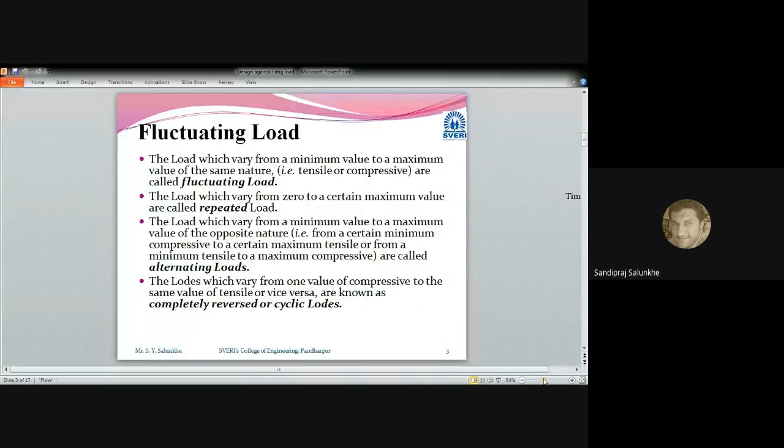Next point we are going to see is the fluctuating stress. As already we have seen, when a load is applied on any component, it will induce stress. That's why there are the same types of stress which get induced in that component, namely fluctuating stress, repeated stress, alternating stress, and completely reversed or cyclic stress. In this case, the definitions remain the same, except instead of load, the word stress comes into picture.

The stress which varies from a minimum value to its maximum value of the same nature is called fluctuating stress. The stress which varies from 0 to a certain maximum value is called repeated stress. The stress which varies from a minimum value to a maximum value of opposite nature is called alternating stress. And the stress which varies from one value of compressive to the same value of tensile, or vice versa, is known as completely reversed or cyclic stress.

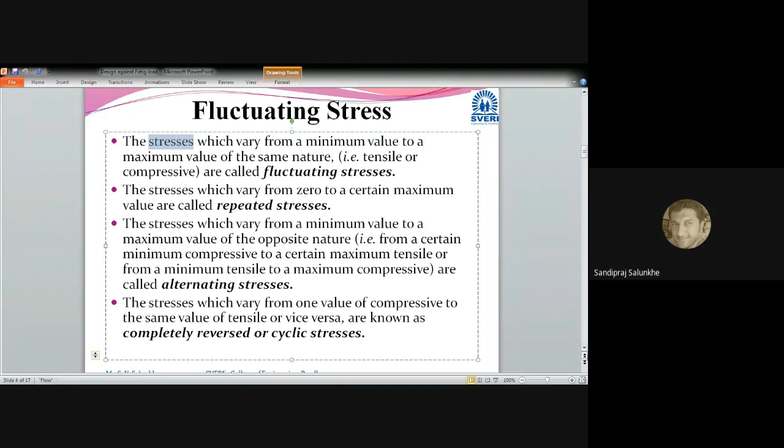As we have seen in case of loads, loads are also defined in the same manner - fluctuating load, repeated load, alternating load, and completely reversed load. These same loads create the stress. So when we say stress gets induced in a component, it is a product of the applied load or applied force. So the definitions of fluctuating stress, repeated stress, alternating stress, and cyclic stress are parallel with the cyclic load definitions we have seen.

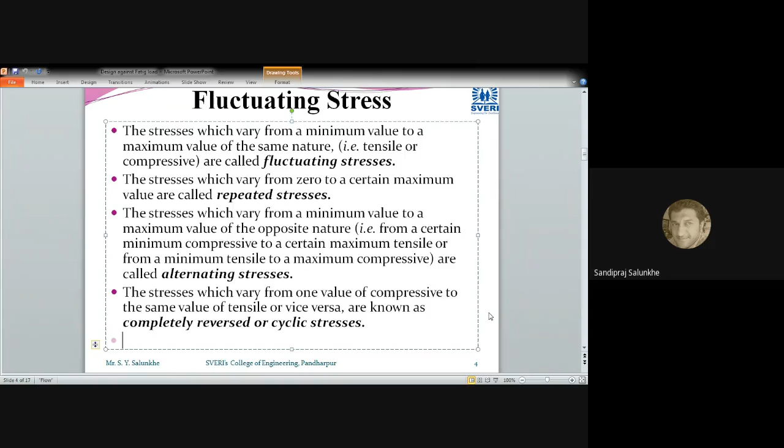Now let's see how these loads actually behave - that means how fluctuating stress looks. In yesterday's lecture, I drew a graph showing how loads vary, how fluctuating load looks when we plot time versus stress or load. Here time is mentioned on the x-axis and stress on the y-axis. And we will see how repeated load acts.

In this case, we are going to use some terms, and these terms are useful for further study, that's why they are important. We will say that somewhere the value of that stress is going to become 0. So here we consider that stress value is 0 - when we mention stress on the y-axis, its value is 0 where it crosses the time axis. And above that, we take the reference of the 0 axis and calculate or measure the stresses.

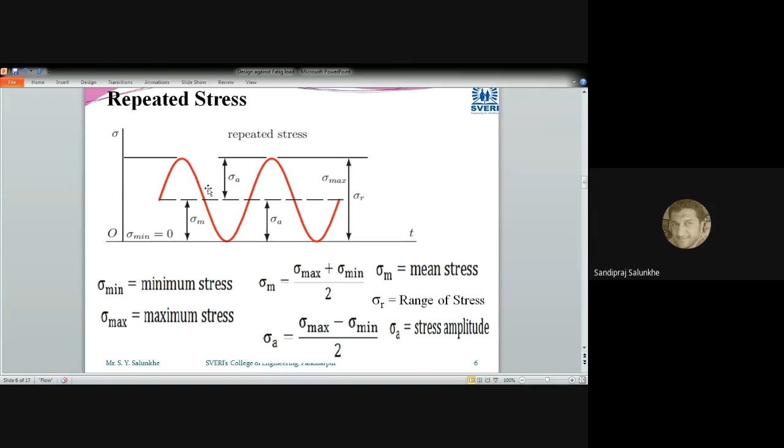Now, the second type which we have seen is the repeated type of stress. This repeated type of stress and fluctuating stress vary from each other. In this case, this repetitive type of stress is induced on one side, and its value is going to become zero. If you see in case of fluctuating type stress, this value may not become zero; stress remains above the zero line. Whereas in case of repeated stress, this value of stress has to become zero, and only then do we call it a repetitive type. That means once the tensile stresses are induced to their maximum value, the minimum value will again become zero.

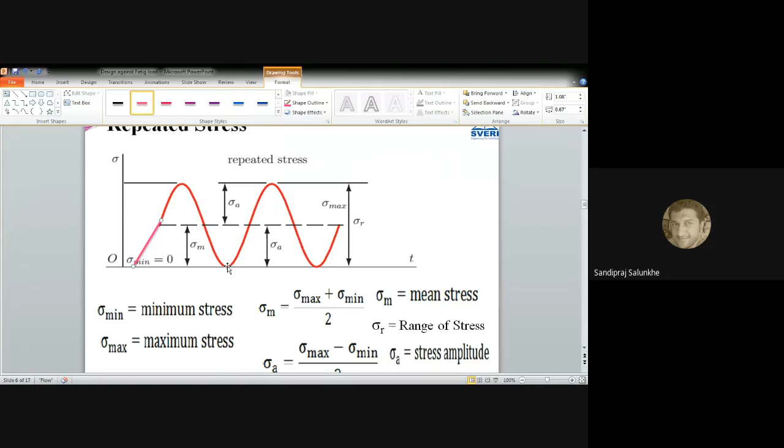Though this sinusoidal curve has started from this point, which has been drawn here only for the sake of understanding, otherwise this curve has actually started from zero, and it is like this. So from zero it has started, going to reach its maximum value, then again coming to zero. That type of stress you are going to call a repetitive type of stress.

So in this case also, it differs from fluctuating stress only by the condition that it becomes zero. It doesn't mean it goes to the opposite side; only that the component has a relaxation period, that is, zero stress time will be there for that component. So the stress becomes zero and then reaches its maximum value, and it repeats. So it is called repeated stress.

The same formulas which we used in case of fluctuating type of stress, we are going to use here, and the nomenclature remains the same. That is, sigma min is the minimum stress, where it becomes zero. Then maximum stress is denoted by sigma max, mean stress is denoted by sigma m, amplitude of stress is denoted by sigma suffix a, whereas range of stress is denoted by sigma suffix r.

And from this, we are going to calculate the mean stress. Definitely this mean stress becomes maximum divided by 2, because minimum stress is 0 in this case. But the formula used is the same as used in fluctuating type of stress. Now this is going to become the amplitude of this wave.

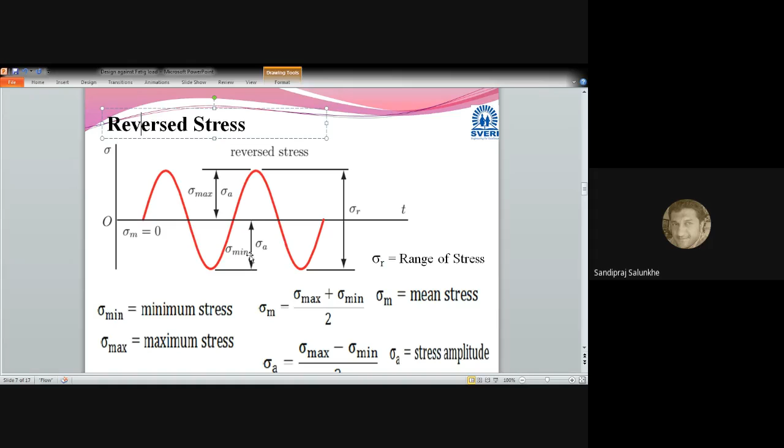An important thing is that we calculate the amplitude of stress as sigma max minus sigma minimum, divided by 2. This amplitude of stress is the important quantity we use while designing components under this type of stress.

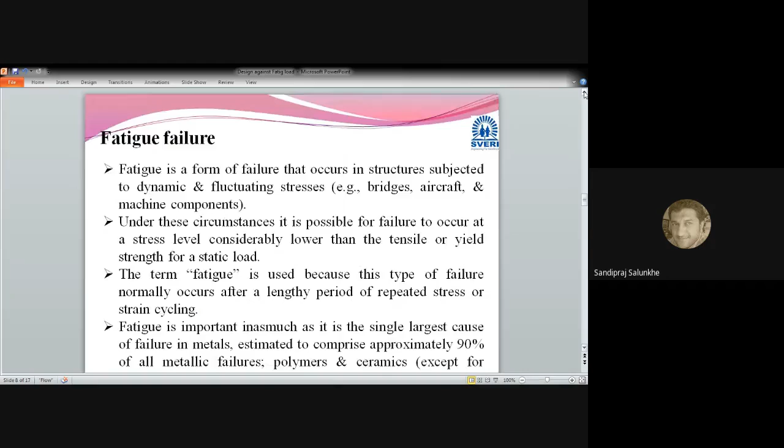Once this is over, we move to the next point, which is fatigue failure. But before that, let me ask some questions related to these three types of stresses which we have just seen graphically.

Hello, are you ready? So how can we differentiate this fluctuating type stress from the reverse stress? How can one recognize it? Is there any criteria by which we can recognize this? The problem statement gives us an idea that these are repetitive type stresses.

Sushant Jadhav, will you please unmute yourself? Hello, Sushant Jadhav. Did you get my question, Sushant?

Yes sir, how can we differ it? If we read the problem statement and want to solve that problem, how can we say that this is fluctuating type and not repetitive type or reverse type?

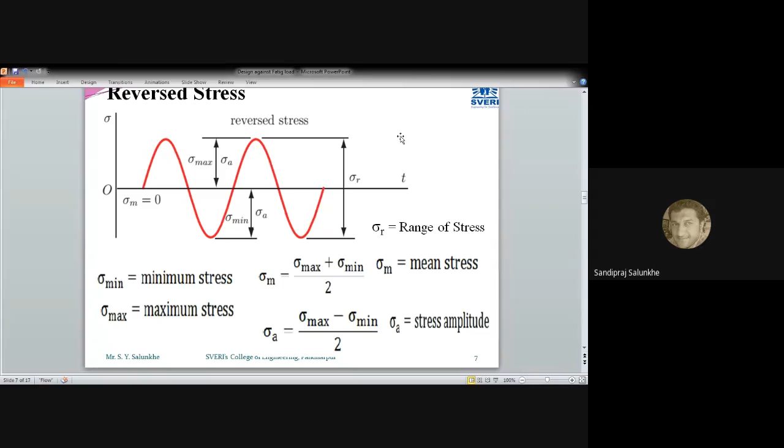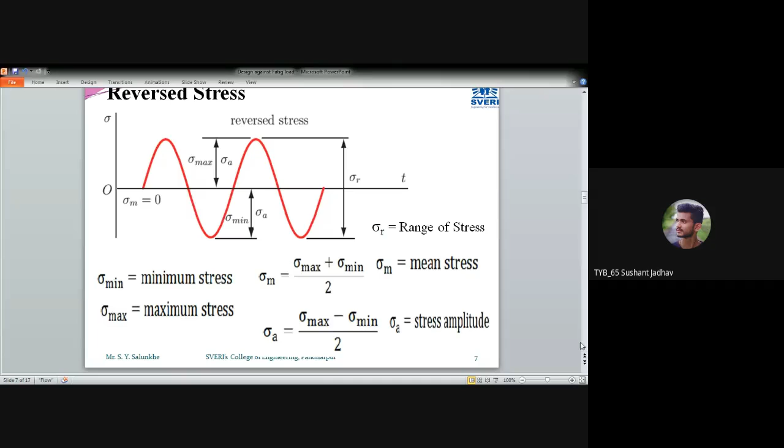Hello. If not, we'll go to the next slide. Yes sir, hello, yes, you are audible. Will Sushant Jadhav please explain fluctuating stress and reverse stress again?

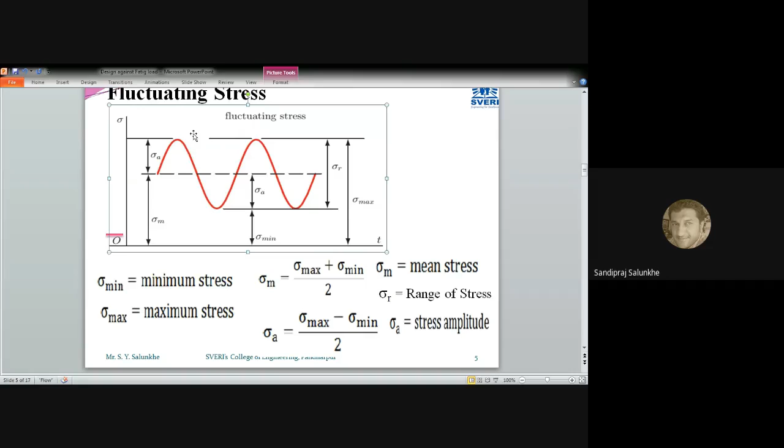These are the fluctuating stresses, where they remain on one side of that zero stress, and they are not going to become zero at all. They are never zero. Just when the component is initially loaded, the value may be zero, and from here it may start, but after that they are not going to become zero, and they stay to one side of that zero stress level. If they are in tensile nature, they remain in tensile nature only, and if they are in compressive nature, they remain in compressive nature only.

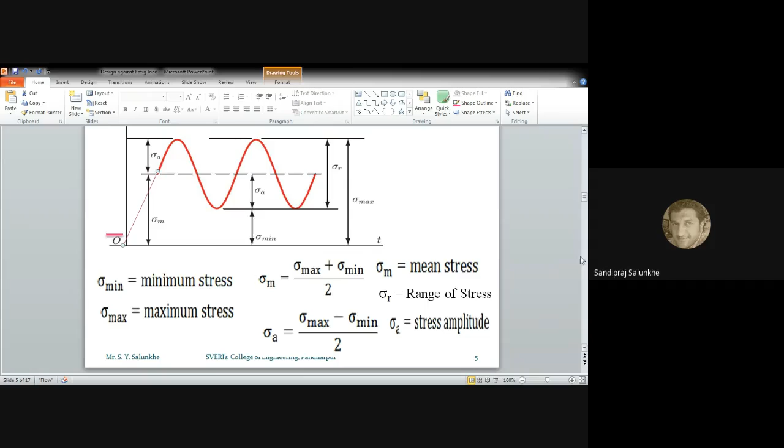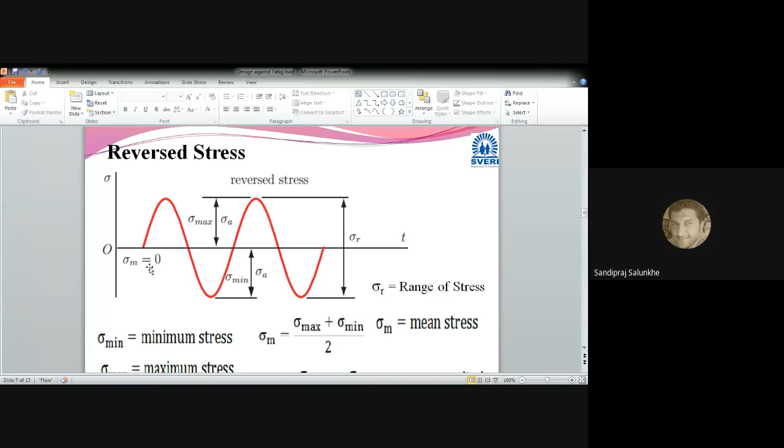Whereas in case of the reverse type, they may first be compressive then afterwards tensile, or first tensile then later compressive. That means they go from compressive to tensile, and their value, that is amplitude, remains the same on the tensile side and the compressive side. Do you get it? Okay, got the point, yes sir.

Yeah, okay, no problem. Anybody else? Okay, I will take attendance now, and in the next lecture we will see the fatigue failure.